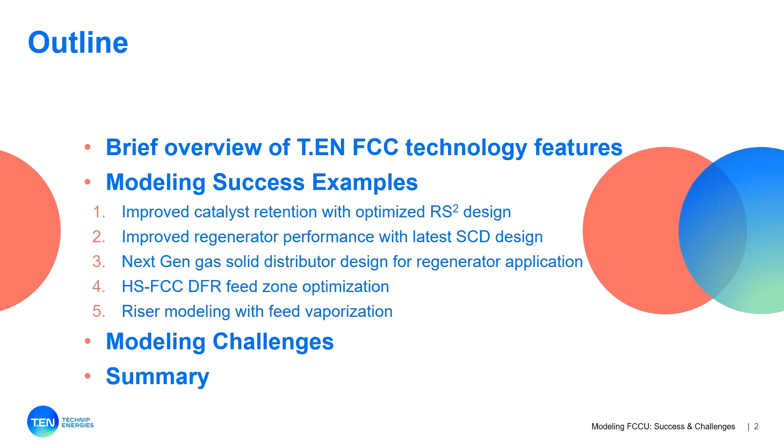And last, we have a modeling challenge example. Not everything we can model. So I will discuss one of the cases where we are facing a lot of challenge to model it. And maybe it will open up a brainstorming session with you guys to see what else can be done in that regard. And finally, the summary. So start with the technology features.

So this is how our FCC looks. It's a 2-stage regeneration with the reactor. There are a lot of proprietary components in that. The riser termination device, we call it RS2, riser separation system, the stripper packing, the baffles in the stripper section, the feed nozzle, air ring, the spent cat distributor, the Y bar tub distributor, which we put in a first stage or in a single stage, and a mushroom type distributor, which we have in the second stage of the regenerator, and a cat cooler bundle, which is our modeling challenge, basically.

So apart from the air ring, I think we have used Barracuda in all different features to see what type of improvements we can make when we make the hardware changes, what should be the impact, and whether that impact is going in the right direction or not. So I will be discussing these in the follow-up examples.

But a quick note on the FCC, it's a fluidized bed. You have a feed over here in the form of oil droplets. The hot catalyst comes over here from the standpipe. It flows along the riser, cracks over there. The vapors and the catalyst separate in the riser termination device. Catalyst goes down, flows down through the stripper packing, the baffles, steam strips the hydrocarbons, and the vapor goes up to the main fractionators, catalyst flows down.

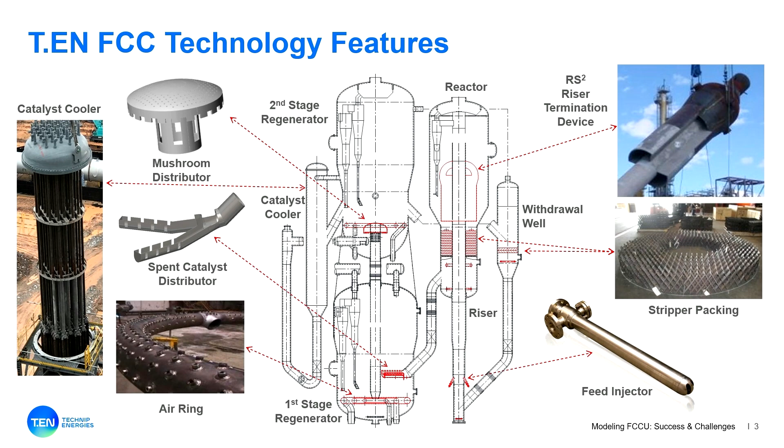In the regenerator, as a byproduct, coke is deposited on the catalyst. So we burn some of the coke in the first stage, then move the catalyst to the second stage, burn it over there. If there is too much coke, we have a cat cooler design to remove the heat. So simple design, fluidized bed, kind of a pneumatic flow in the riser. We have a downflow in the stripper section, turbulent bed in regenerator 1 and regenerator 2. So yeah, it's a whole circulating fluidized bed.

Moving to the next example, the first one, the improved catalyst retention with optimized RS2 design. And this slide basically shows our evolution of the riser termination device. Right from the 1980s, we started from uncoupled RTD systems, ballistic separators, steerhorn, different versions of the RTD.

And then we moved to RS2, which is a close coupled with cyclone design. We have a first generation design 20 years back. We did a lot of testing in late 90s, where we did a cold flow test, we did modeling, not with Barracuda at that time, but we did modeling, we came up with the design, we have implemented it in almost like 30 different applications, and out of which almost 60% are revamps. We got reduction in the dry gas from 8 to 18%. Catalyst retention is pretty good.

But now we are also looking at the next generation of RS2, because there's always room to improve, always room to see what next we can do. And we are having a next generation, next campaign going on with our alliance partner, IFP, where we do a lot of testing. And before we get into the testing phase, Technip, IFP, Exxon, we all have done a lot of modeling with Barracuda to see what different changes we can make to improve it further, to make it more compact so that we can preserve the olefinicity of the products, and we can improve further the catalyst retention out of that.

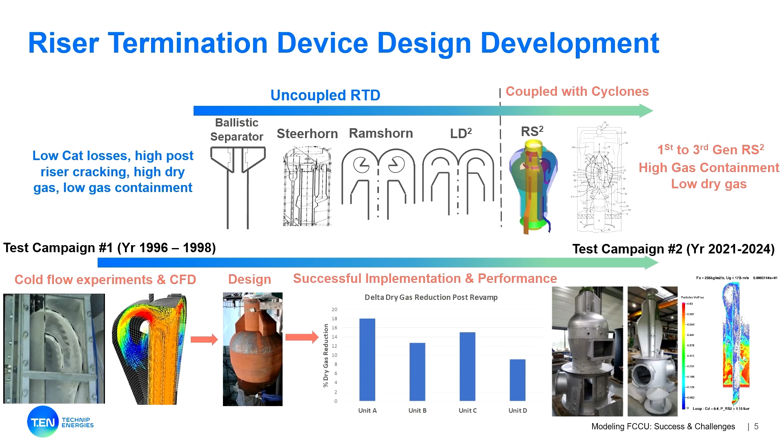And during the course of time, we tested different configurations, and we found one, the second generation, I'm calling it, because our standard offering earlier was a two-chamber design. From two-chamber design, we went to a four-chamber design, and from the CFD we found that it looks like the efficiency is going to improve quite a lot. So we looked at the different angles, the flow, velocity profiles, and some quantitative comparison of the efficiencies, how much it can give in terms of the delta improvements. It looks pretty good. It's more symmetrical, more compact.

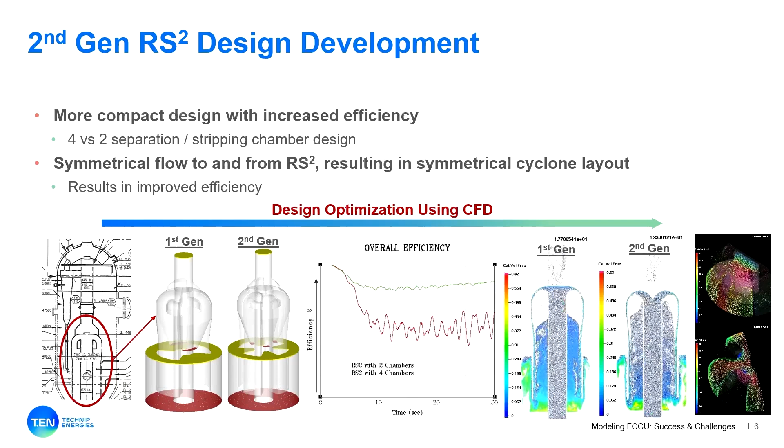So in one of the applications, we decided to install it. It is a low risk proposition for us. So we installed it in one of the units, but before installing it, we looked at it with more depth. It's not just the process performance. We also look at the mechanical reliability, the erosion pattern, because generally these RTDs don't need any maintenance for multiple turnarounds, which means like 10 years, 15 years. By looking at the performance, are we jeopardizing the mechanical reliability? So we looked at the erosion patterns.

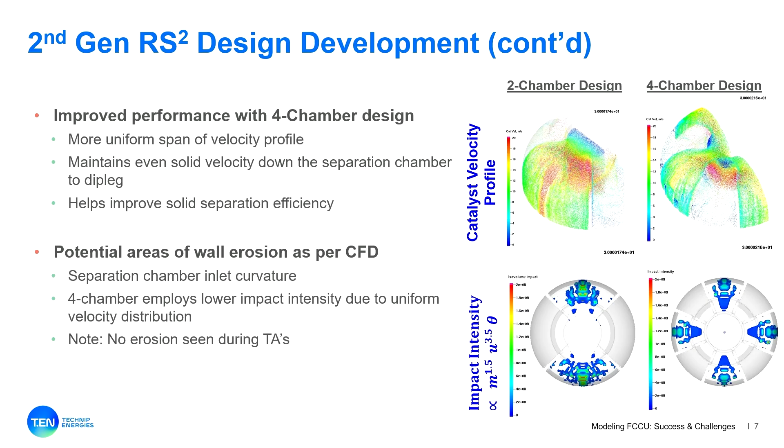It looks like the velocity profiles are a lot more uniform when we go from a bigger chamber size to smaller ones. It's just an analogy of cyclones. When you have two big cyclones or four small cyclones, the small ones are generally more efficient. So a similar concept over here with this RTD. From a two-chamber design, we went to a four-chamber design, more symmetrical, more even. And then we implemented it in December 2022. So this study was done almost like 8 years back.

And I was talking to Reza, I said, oh, you're showing this stuff, CFD simulation. So are you doing CFD anymore? Not much. But it's a journey. Like yesterday, Peter and Robert were mentioning, it took 9 years. In FCC, it always takes time, the turnaround is going to come in 5 years. So it was implemented in one of the turnarounds in December 2022. They have been operating for almost a year now. It runs smoothly, no surprises.

Actually, they got a lot higher catalyst retention. Here I'm showing the slurry BS&W from pre versus post turnaround, almost constant. There are some hiccups during the startups, which always happen. They had a couple of startups after the turnaround, but they are almost stabilized, no more surprises. And the revamp was done for a higher severity operation to maximize propylene. Higher severity comes with a higher riser velocity, higher cat circulation, higher conversion, lower slurry yield.

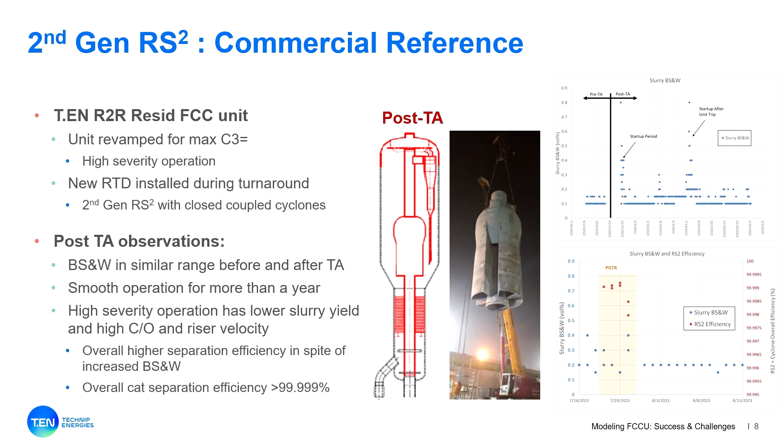So lower slurry yield means that the BS&W, the ash concentration, is higher, but slurry yield is lower, which means that my catalyst collection efficiency is much higher, in spite of the fact that the concentration is more. So it is running pretty smoothly. Client is happy, we are happy. So this is our second generation, before we move to a third generation, which we already have a campaign going on for. So this is one good example of modeling, testing, and real application of it.

I will move to the second one. No, before moving to the second one. So there's always a concern in the CFD. Are we capturing enough details in the model? In the earlier models, we did the section around the RS2, a limited boundary.

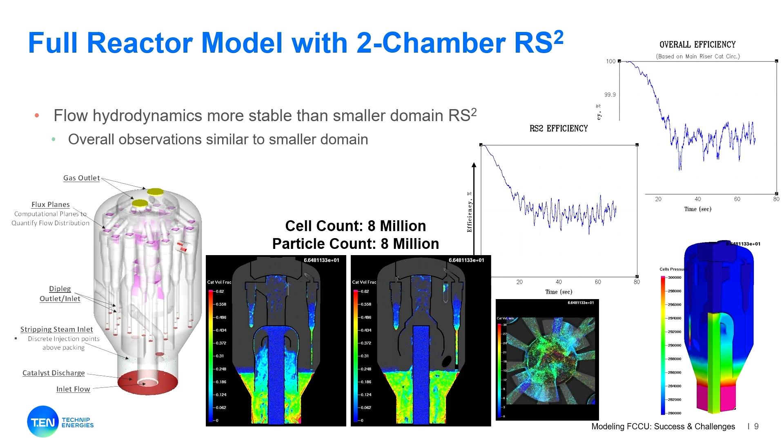So our smaller domain and the larger domain, we do like to check over the course of time to see whether we are covering enough details or not. So this is one of the examples where we find that it was interesting to capture all the details. Cyclones flow, it has almost like, I think, 22 cyclones, something like that, and that was also captured in the model. Now moving to the second example.

Here, as Joe was mentioning, the different versions of the spent cat distributor. So this shows our journey of the spent cat distributor from, again, 1980s. We started with a hockey stick with a slotted opening at the bottom. Then we have the bathtub, then single arm bathtub, then we moved to a Y bathtub. Then from there we moved to a compound angle so that we can maintain the flow, the momentum in the first section, and then to slow down from compound angle we move to a, again, Y or a single arm, but submerged bathtub. So it all depends upon the feedback we got from the industry.

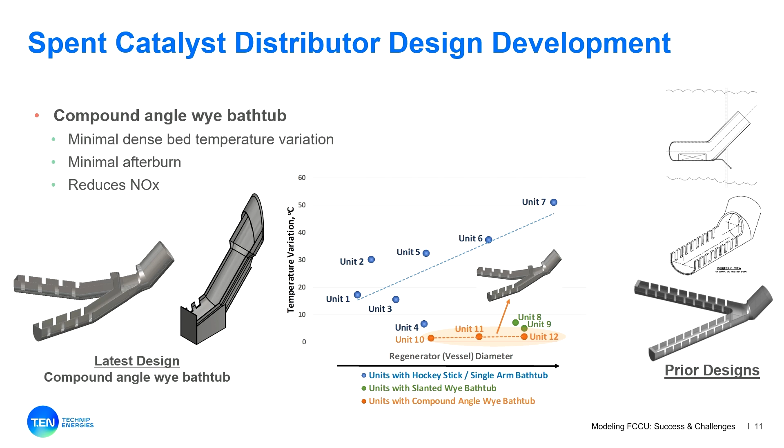As the FCC units become bigger and bigger, the regenerators become bigger and bigger, as I'm showing over here in terms of the diameter. There is a temperature variation from one side of the vessel to the other side, in what we call the dense phase, where there are 4 thermocouples. One side, where we are dumping the spent catalyst, was showing a lower temperature versus the other one. So this delta goes pretty high. So with these improvements or changes in the design, which was modeled, we have lowered that temperature variance in the bed and the afterburn in the vessel.

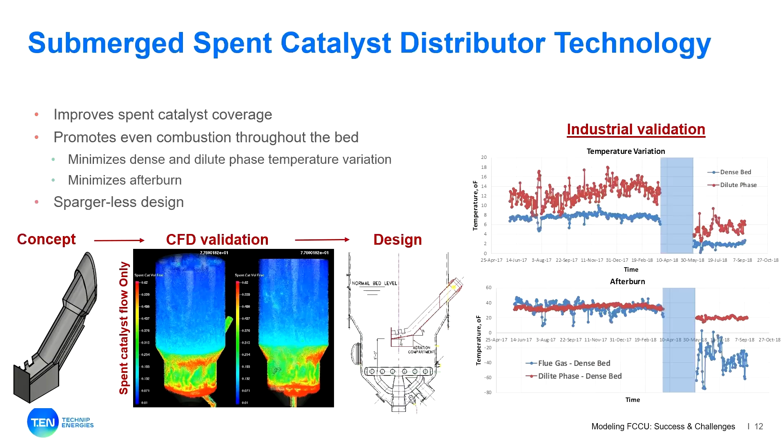And here I'm showing one of the examples. This design was implemented in Suncor Edmonton. The paper is also published, where we changed the existing spent cat distributor with a single arm, because there's a small regenerator, submerged in the catalyst bed. Gives a lot better distribution. The temperature variance in the dense bed and dilute bed both goes down. Afterburn goes down. So it was a successful implementation. We already have 3 total installations of this type of distributor in the industry right now.

Moving to the third example. Here we are showing the journey of a gas solid distributor, a mushroom type distributor which we are using in the reactor and in the second stage regenerator. The purpose is to distribute both the gas and the catalyst coming in from the riser or the lift line into the catalyst bed. So we moved from a simple bird cage to a mushroom distributor. Then we added some features, the skirts at the ends or sides, mainly to improve the coverage of the catalyst in the bed.

What we found from the initial modeling is that the flow coming out of the lift line or the riser is concentrated in the center only. But our initial thought was, are we modeling it correctly, or is what we are seeing a real thing? So we did the testing at IFP, where they also found, based upon the helium profile, that there is higher concentration in the center, which proves that what we are modeling is a real thing. So based upon that, we had a number of ideas, we modeled them but not tested them. And then we came up with a final design of mushroom with the branch arms to spread the vapors all across the vessel.

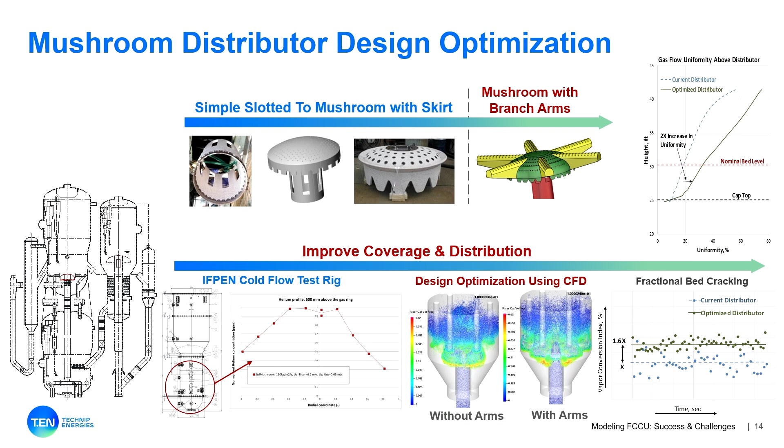Quantitatively, it looks like the gas flow uniformity increased by almost double. The reaction conversion increased by almost 60%. So that was in the reactor application. So now we're looking at how we can apply it to the regenerator application.

In the reactor application, the riser was having almost 90 to 95% of the flow. Here, we only have a part of that. So here I'm showing two configurations. Industrial scale regenerator, second stage regenerator, we use that. This was the existing one, and here we are trying to do changes in that existing one.

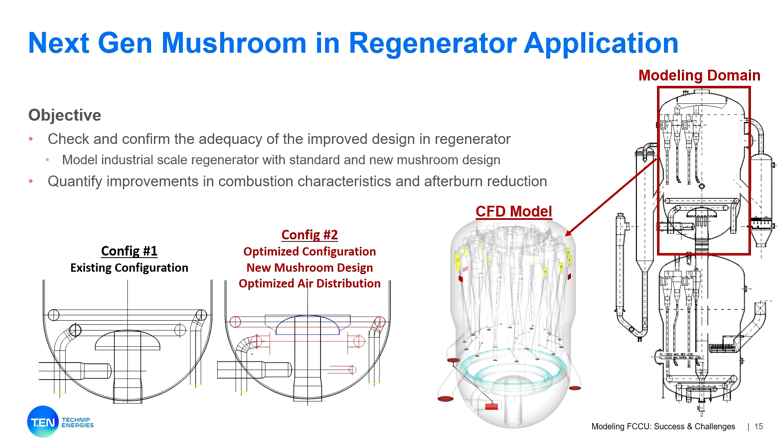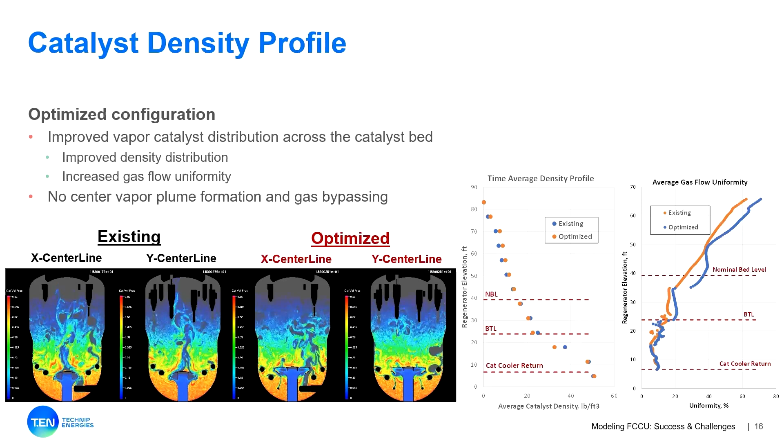We lowered the rings, raised the mushroom, put a new branch arm mushroom over here to see what the results will look like in terms of the afterburn, coke burn, temperature profiles, and flue gas analysis. Some of the results show again that the vapors are not concentrated in the center. They show a lot better coverage in terms of gas flow uniformity. It improved. The density profile looks good. It looks a lot more promising compared to the earlier design.

Here we're looking at the temperature profile. As Scott was mentioning earlier, in this model we're not seeing a reduction in the afterburn, but we do see increased carbon burnout rate, or more efficient use of air to burn the carbon. So we may need to adjust the carbon which is coming in on the existing particles to match the carbon burnout rate, but definitely there is an improvement in the coke burnout rate, which is the result of the improved coverage.

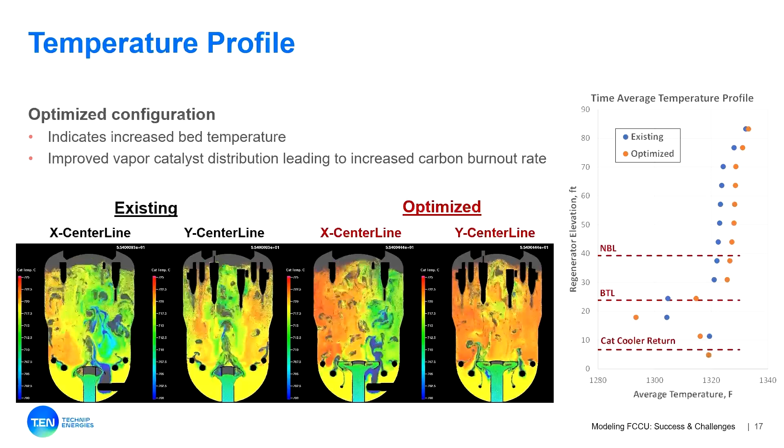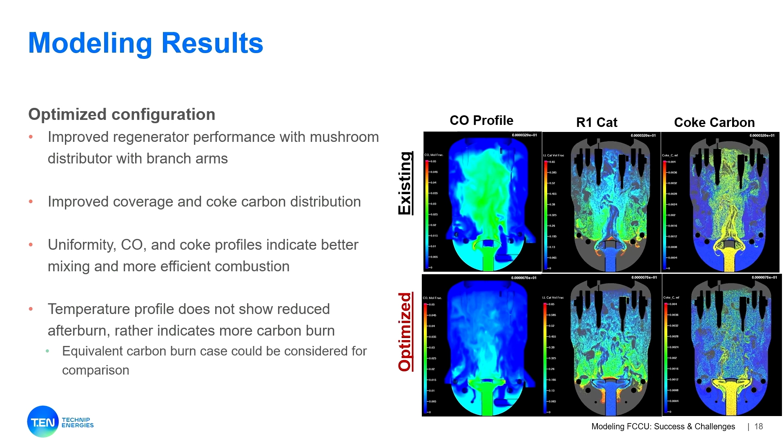We also looked at the CO profile in the existing one, which is pretty high in the center. By using the optimized design, we reduced that. The catalyst coming from the lift line is a lot more distributed compared to the existing design with this new distributor, and even the coke carbon concentration shows a lot more mixing compared with the existing one. So now I will hand off the rest of the presentation to Scott.

Thank you, Raj. Appreciate the introduction. Just a couple of other quick examples. So we're talking about FCC and different iterations of it. One of the versions of FCC is our high severity FCC that we license. Axens also licenses this technology. Originally developed at King Fahd University with Nippon Oil and Saudi Aramco.

But this is unique because instead of a riser, it uses a downflow reactor system. The main difference is that in a riser, you have a lot of back mixing. You inject a feed, it's all getting mixed and swirling around. Here, the feed zone is very important because as you travel down the downflow reactor, there really isn't any radial mixing. So that first portion of injection is very critical.

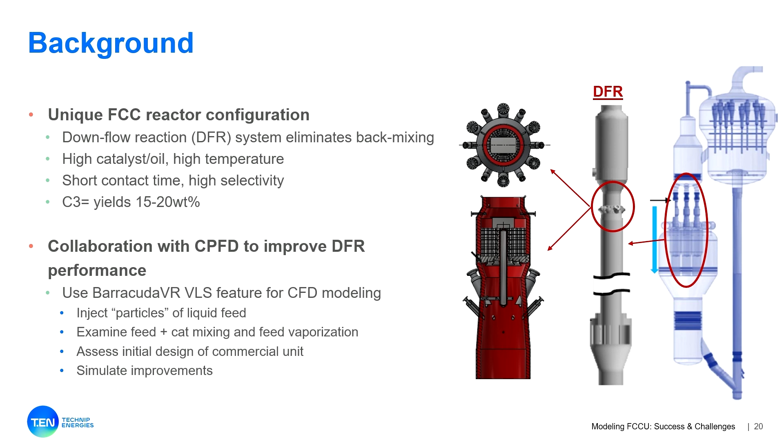We did a little modeling, injecting the feed as a vapor, and there's a lot of internal debate on whether we're really capturing everything. So we approached CPFD, and they did some modeling with this VLS feature. I think it was a beta feature at the time. We're injecting particles of liquid feed, so we can look at the catalyst and feed mixing in that zone and try to improve the performance of one of the commercial units.

So this is a little bit about the model. Basically we have the catalyst flow boundary coming in. There's 6 injectors around the circumference. There's feed being injected through the feed nozzles. There's multiple discrete points for each feed nozzle, spread out in a fan pattern. From cold flow modeling of our feed injectors, we know the droplet size distribution, the volume flux distribution, the spray angle.

So we can simulate all of those aspects of the feed nozzles and try to simulate what's happening in this section. Steam is just injected as point injection boundaries because it's not as critical as the dispersion of the feed. And then we've got just a simple pressure BC at the outlet here. You can see on the right basically a plan view of how the droplets are being sprayed into the downflow reactor.

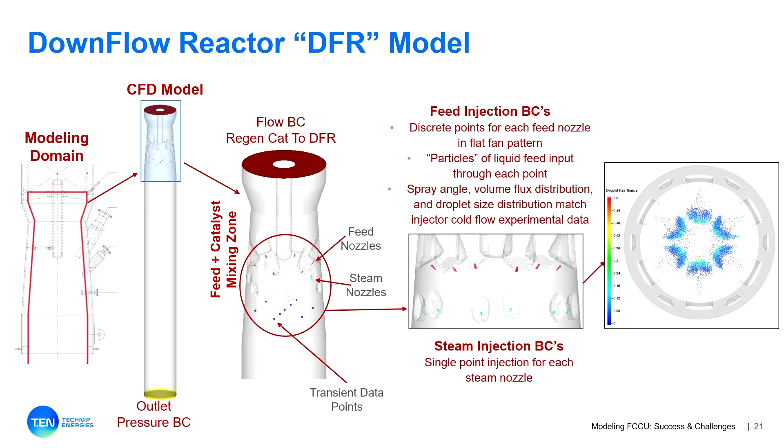So base case simulation was run. You're going to see particle volume fraction here and also fluid temperature. One of the things you notice right away is you get a lot of catalyst bypassing the feed, so there's not perfect mixing and really good interaction. You've got catalyst bypassing between the feed nozzles. You've got a central core of catalyst in the center because the feed is not penetrating to the center. So you can easily see that in the particle volume fraction.

Also in the fluid temperature, you see a very hot zone in the center, and then a little bit also along the walls. So using this modeling is really helpful in identifying some potential phenomena that's going on in the feed mixing zone. And of course, as you travel down the downflow reactor, you see very little lateral mixing. You get one shot at it at the beginning to get it right. If you don't get it right, you're stuck with it.

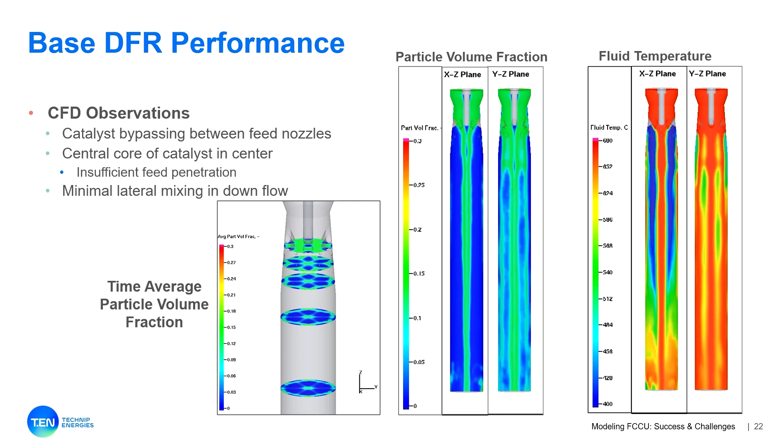So we simulated some modifications. The modifications were basically, okay, let's put a baffle above the feed nozzles, block all the section between the nozzles. Enlarge the plug so the feed didn't have to penetrate as far to the center. And then put one mixing baffle at the bottom, kick out the catalyst from the walls and give it one chance to mix before traveling down to the fully developed zone.

And you can see on the right, particle volume fraction and fluid temperature comparison between optimized case and original case. Things you can notice are, the central core of catalyst is still there, but it's definitely broken up a lot more than the base case. And you can also see in the fluid temperature, it's just a lot more homogeneous fluid temperature across the downflow reactor than the base case.

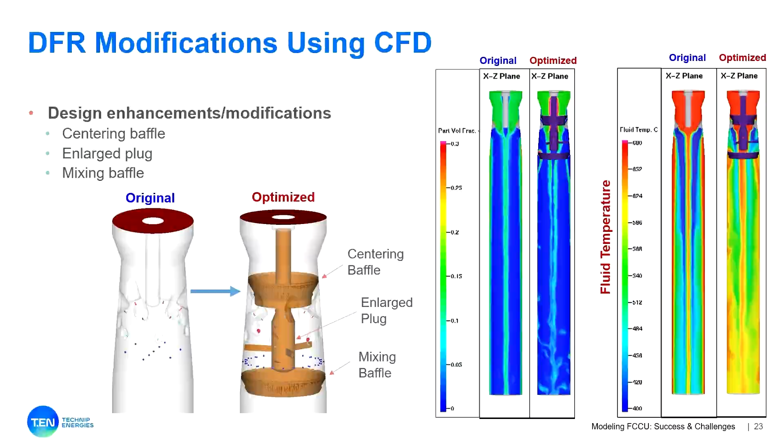One of the things, though, about the VLS is that it really gives you another metric to look at. This is what I like the most. You can really see the improvement here by looking at the feed droplet residence time and also the liquid fraction of the particles as you travel down the downflow reactor. So you can see droplets hang around a lot longer in the original one. We're vaporizing everything more quickly in the optimized design. There's very few droplets that make it further down the downflow reactor. And liquid fraction is just another way of looking at basically the same phenomena. And you can really visualize the difference between the two cases.

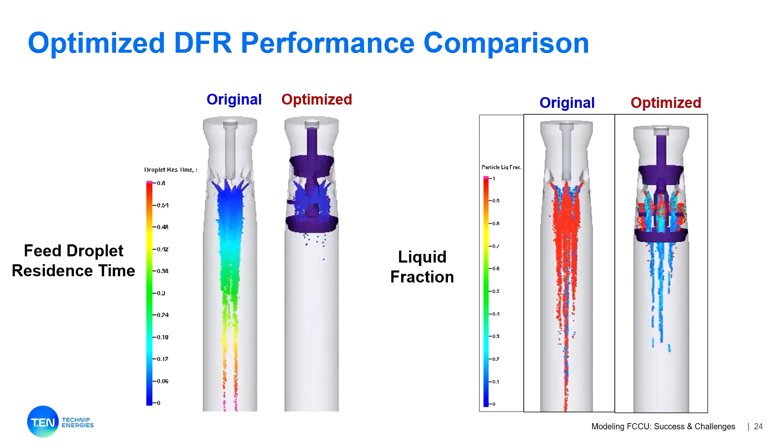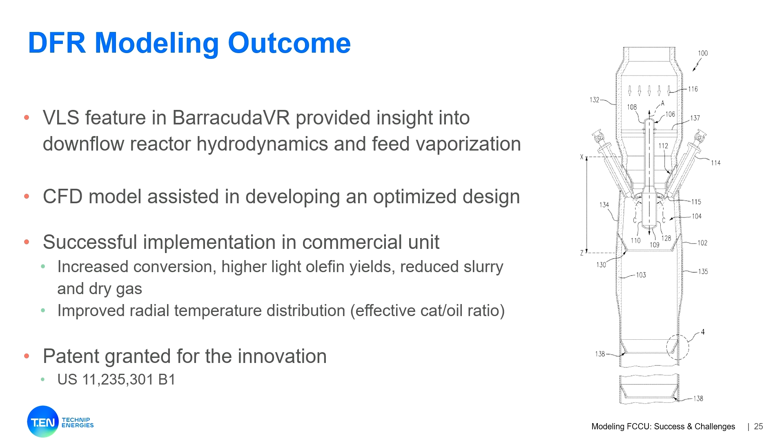So this was really nice. We worked with CPFD. They modeled this. The model helped us assess different designs. It was implemented in the commercial unit, and of course they immediately got increased conversion, higher olefin yields, lower dry gas, lower slurry. Very successful project, and ultimately, there's a patent granted for this design, so you can read about it more if you're interested.

So after working with CPFD on that, I thought, well, why don't we try the same thing in a riser? Let's set up the riser model and try to use the same VLS feature. So I set up this riser model for another commercial scale FCC unit with 60,000 barrels a day. So the model, you've got your flow BC, hot catalyst coming in. You've got the injectors. There's 8 injectors around the circumference. We arranged the feed nozzles in a similar spray pattern, and again, pressure BC at the outlet.

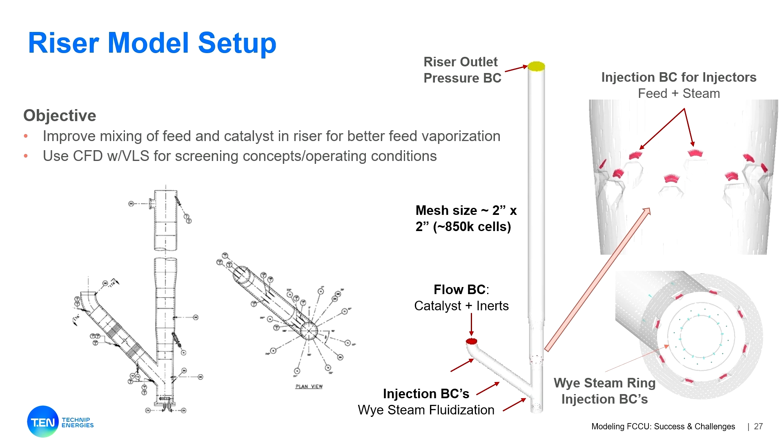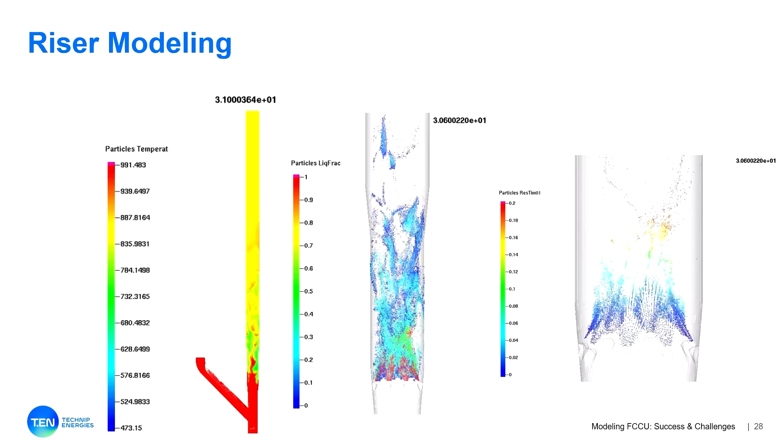And here's what happens when you do a riser. So you've got particle temperature on the left, liquid fraction in the center, and then particle residence time on the right side. And so you have to wait about 20 seconds into the simulation. I delayed the feed injection because if you start it right away, the bottom just fills up with liquid particles, and the model didn't really like that too much. But you can see after about 20 seconds, the feed's injected. Kind of cool illustration of the spray and the feeds coming in.

But you can see, probably about the light blue to green, droplets are really disappearing. So if you say somewhere between 50 and 150 milliseconds, most of the droplets have disappeared. Probably the big ones are still hanging around, but they're very few. So it's a really interesting metric that we can use.

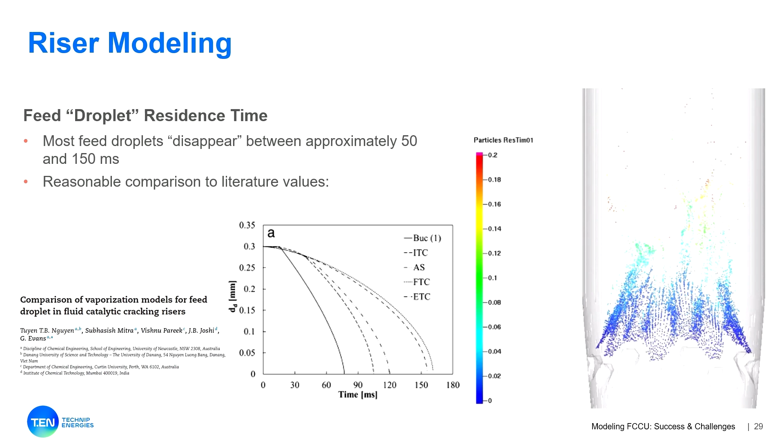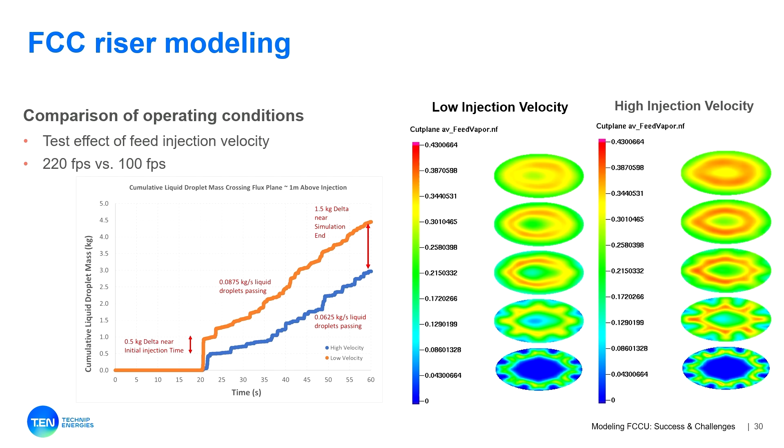So go back to Raj for the last portion.

The last one is the modeling challenge we are facing. Mainly, it's a commercial scale catalyst cooler, which has 32 clusters, 6 tubes each cluster, almost 200 tubes, and difficult to model. Lot of walls, and very computation intensive. We're using 7 million cells, 32 million particles, because that was our hardware limitation also. It's already reaching 30 GB RAM of the GV100 card.

It doesn't show the profile which generally exists in the catalyst cooler. We have data for that. It shows a pretty dilute section on this side. Over there, we used different drag laws. We have used the baffle feature also. It was interesting to use the baffle feature because baffles are kind of hollow, so we have to make sure that we are initializing it correctly.

But a lot of the time, the gas flows through the baffle and not to the bed, because now baffles are empty, and gas is going to go to the least resistance path. So we initialized the baffle with zero flow particles over there, filled it, but we didn't get any success.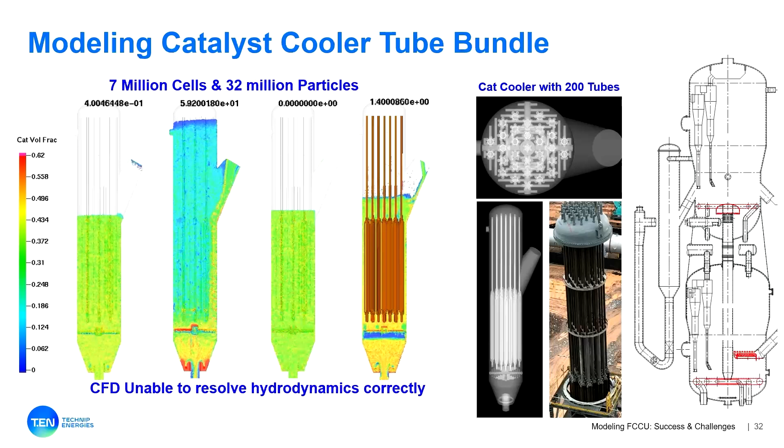Once the hydrodynamics are there, we have to model the heat transfer. Once we have the heat transfer, then the objective is to study the impact of the pitch or the tube clearances or tube gaps on the heat transfer, on the duty of steam production. So our intent is quite big, to capture the whole thing, but we are stuck with the hydrodynamics right now. Yeah. Any thoughts, we can share after our talk.

And the next one, just to summarize, yes, we are actively using CFD. In our group, we use Barracuda mainly to model because we are gas solid, and Barracuda right now is one of the best tools to use. And we are continuously improving designs using this tool to look at what features we can improve further. We are developing new IP based upon that. There are a number of patents we have filed using the results and real applications.

It helps us to screen the new concepts, the testing which we're doing at IIT or other places also. We screen those beforehand because we cannot spend too much on testing all the different ideas. So we use this tool.

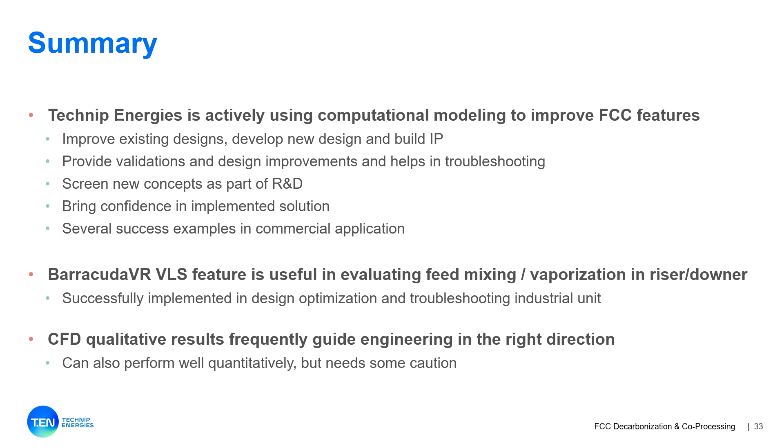The VLS feature, as Scott has mentioned, is helping us to improve further designs in the riser application, in coming up with new process schemes also, which we are testing in terms of the conversions and reduction in the dry gas or other features in the reactor applications. So yes, we have successfully used it in many different commercial applications and got good results.